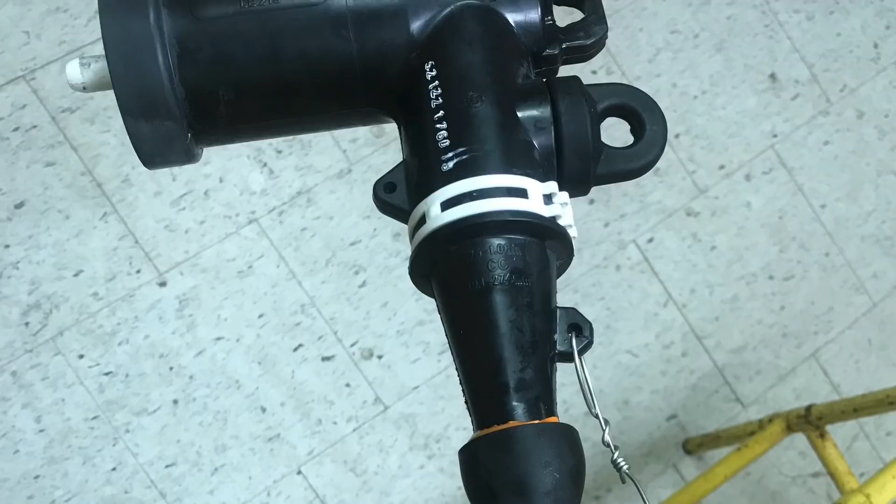In this video, I'm going to demonstrate how to install a Cooper 200 amp loadbreak elbow on a 1-aught compact copper tape shield EPR medium voltage cable.

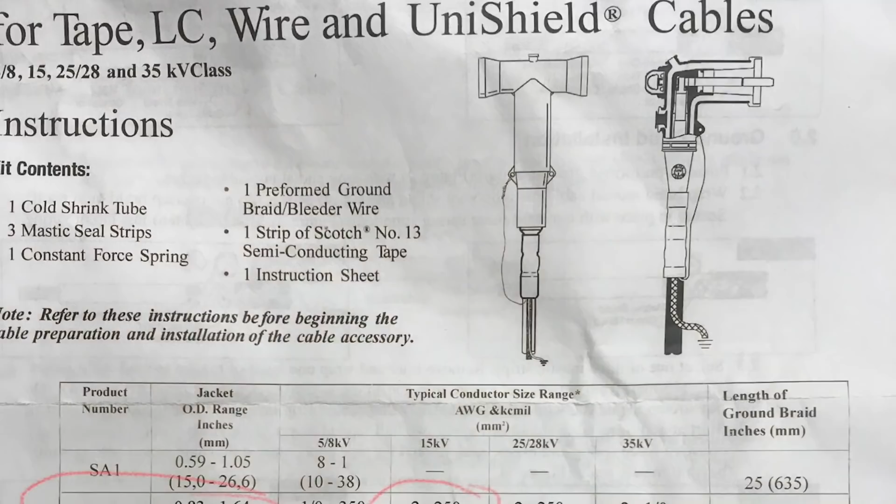Some things to verify before you begin the installation of the termination: that you have a compatible termination for the cable it's being installed on, a compatible shield adapter kit for the termination, and the appropriate size lug as well as the dies for crimping the lug.

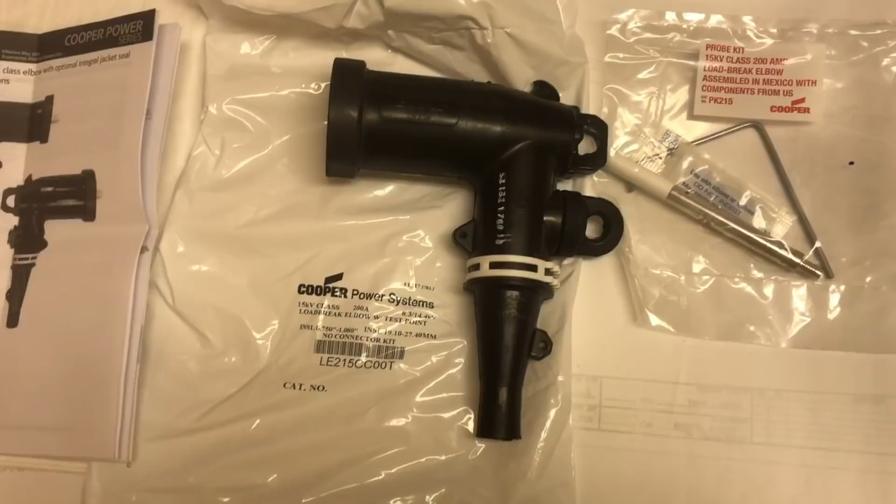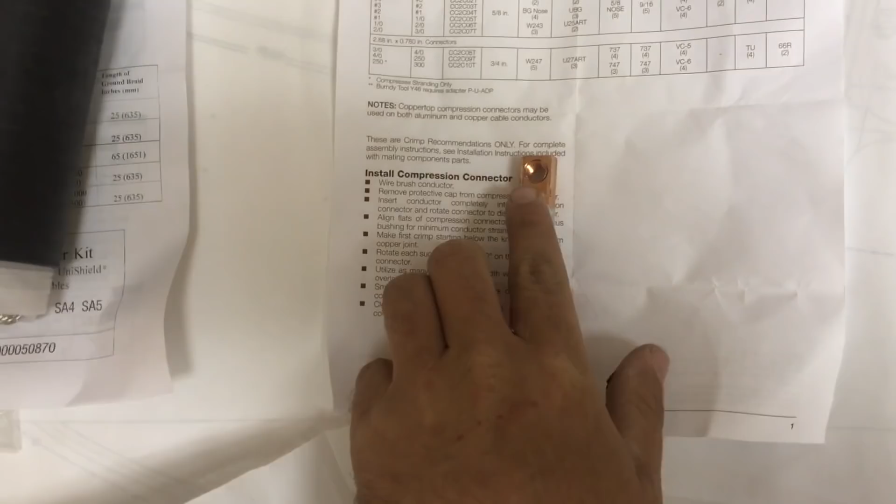Just going over the actual apparatus we're going to be installing today. This is a Cooper 200 amp loadbreak elbow with a capacitive test point. It comes standard with the probe insert tool and a couple of silicone packets. We have a 1-aught Coppertop with a threaded insert right there. You see it's got the threads in there, and that's actually what the probe itself is going to thread into once it's crimped onto the cable inside of the actual boot.

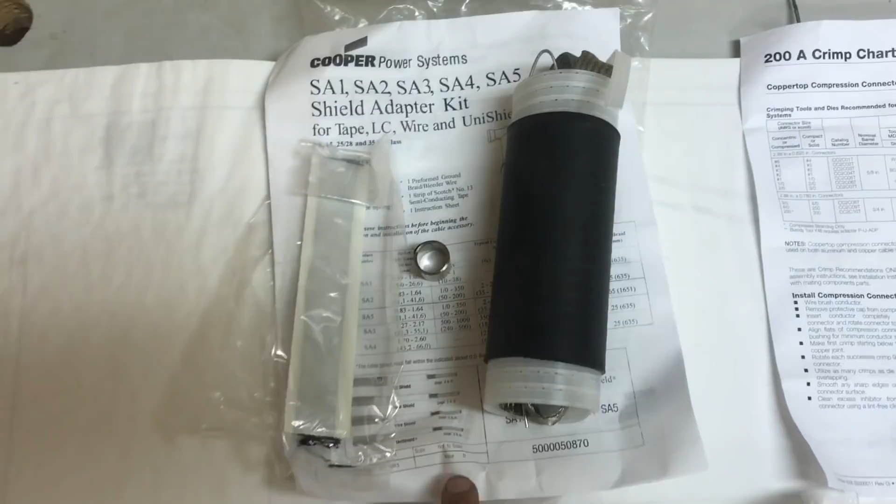And then we have a Cooper SA2 cold shrink kit with ground braid and drain wire, along with the constant force spring and the Mastic that goes along with the SA2 kit.

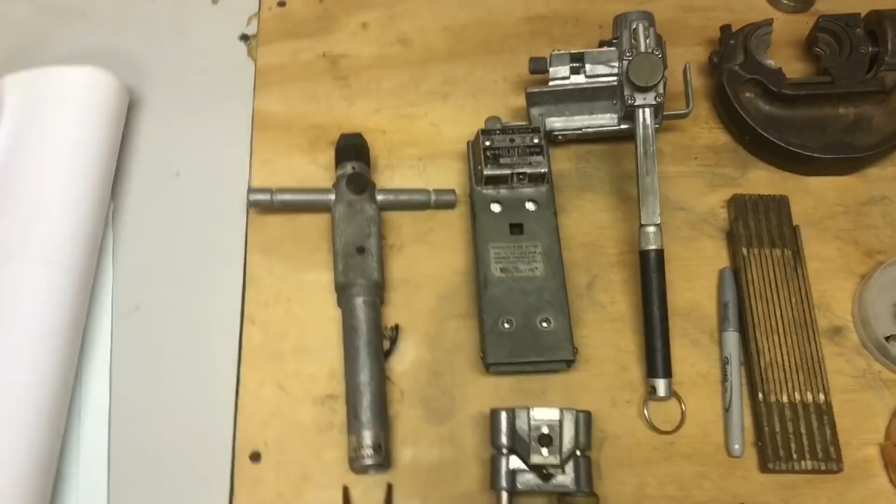I'm just doing an overview of the tools that we're going to be using. So from left to right, this is actually a Ripley brand probe installation tool, which is the same tool as this. It's just this is actually a torque wrench, and you get a little bit better bite on it, and it'll actually snap, it'll pop, when it reaches the appropriate torque.

This is a Speed Systems 1700 SS adjustable semicon score, and a Speed Systems 1542 CL 2CL adjustable insulation stripper, as well as a Speed Systems chamfering tool.

Over here we've got a silver Sharpie. We're going to be marking all the cable with that. It shows up really well, better than a black Sharpie or an oil pen. And we're going to be using a stick rule.

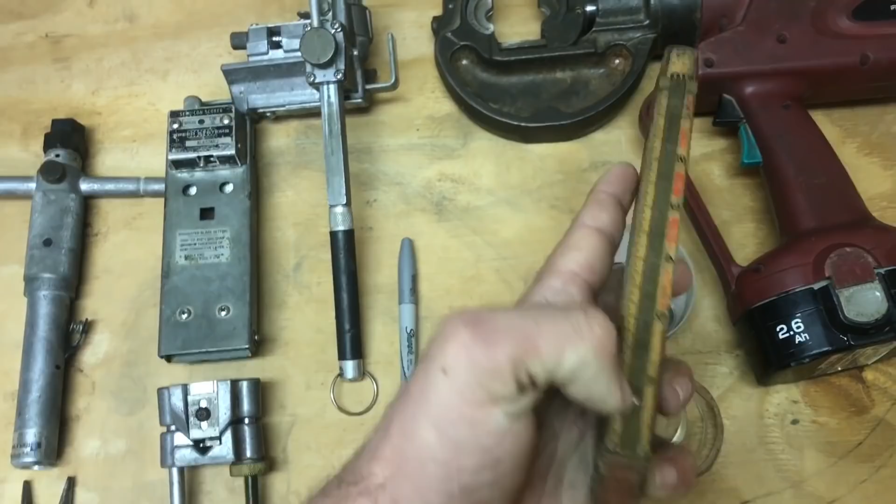And this particular stick rule actually has a slider on it so we can measure the depth of our connector.

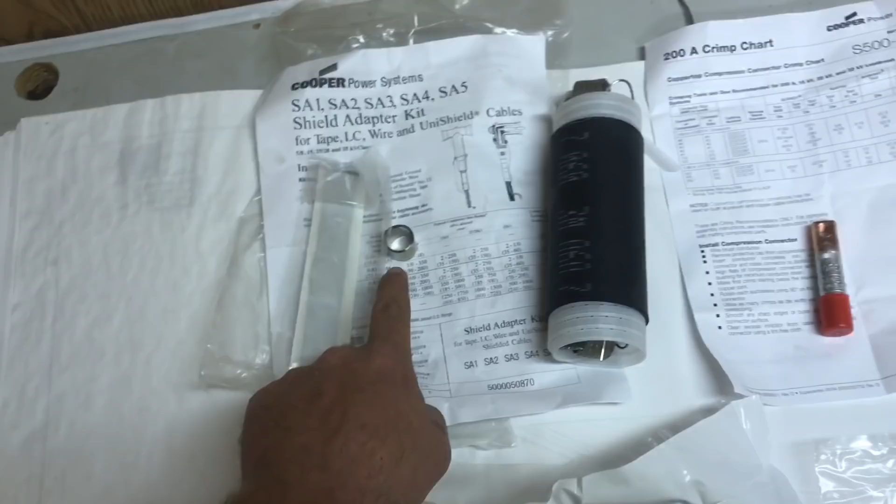These are constant force springs. This is actually a steel spring that has memory to it, just like the wristbands I used to get as a kid. These come standard in ground kits, just like that. And throughout the years, any extra parts and pieces - these are really handy for doing cutbacks on cables. So if you run into those, I'd recommend holding on to a couple. They'll come in handy, and I'll show you why.

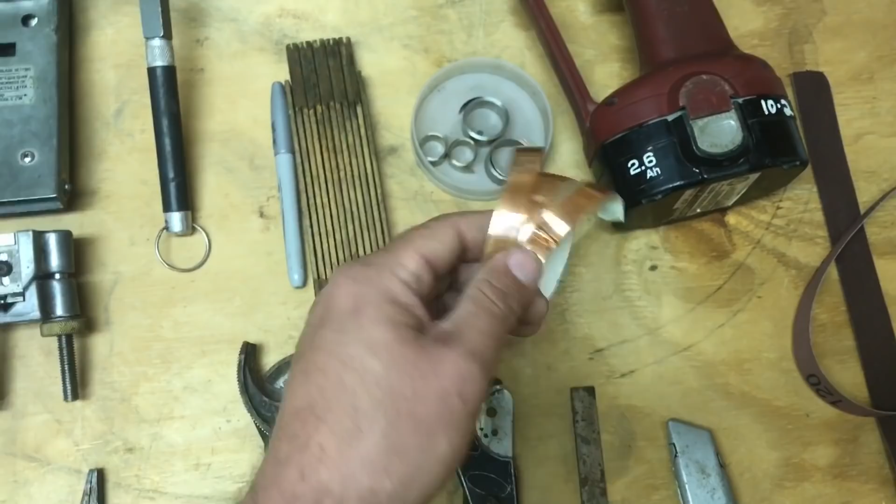This is copper tape, and this comes in handy for doing a cutback on the tape shield cable, which we're using. So I'll show you what that's for here in a little bit.

This is our PAT 750. This is a hydraulic crimper that we use on our termination end.

Some of the hand tools you're using: a standard pair of needle nose pliers, and I actually have a micro pair of needle nose pliers, which is extremely handy for getting into some of the tighter spaces of the cable and making a pretty exact cut or rip or whatever you need to.

This is a pair of duckbill pliers. I think Speed Systems makes a pair of these. These are actually channel locks, but these are really good for semicon cutbacks. Good pair of Klein ratchet cutters.

I wanted to point this out. This particular tool I'm not going to be using, but I did just want to highlight it. This is actually a PVC cutter, and what some guys in the field will use it for is making the ring cut on the insulation. I'm not a huge fan of using this tool because with a little bit of error you can squeeze too hard and actually cut through some of the delicate copper that's underneath. So I'm not actually going to be using that, but I just wanted to point it out.

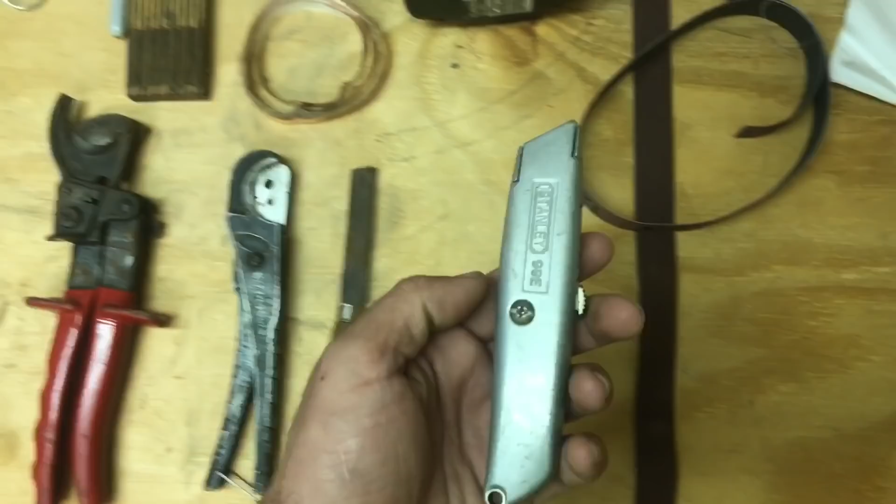This is a shoe knife that we use, a typical splicer's knife. We use that very frequently. And then this is a Stanley, just basic Stanley 99 razor knife, retractable blade. I'll use this every once in a while.

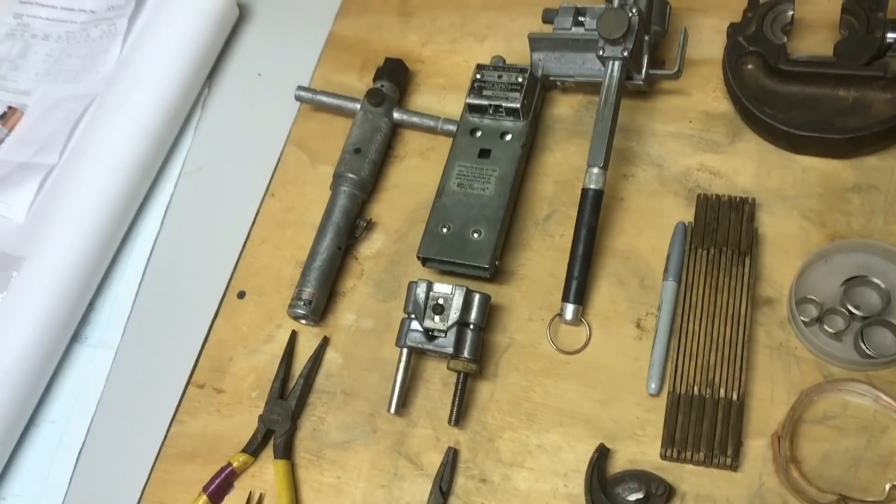Some terminations dictate, just because of the build of the cable or different factors, that you almost have to use a razor knife. Some guys will actually perform the entire splice with a razor knife. I prefer to use the specialty tools to do that - it's just a little less risk factor. I'm not saying you can't do it with a razor knife, it just takes a lot of knife practice, and it's very easy to mess up if you don't have the appropriate practice. So we may end up using this, we may not.

Moving over here to our cleaner, this is a Power Solve, a high voltage degreaser cleaner. We'll be using that to clean our cables. This is a lint-free wipe, it's a 10 inch by 10 inch wipe. And then we have 120 grit aluminum oxide sanding cloth. And that's a summary of all the tools we're going to be using for the particular kit.

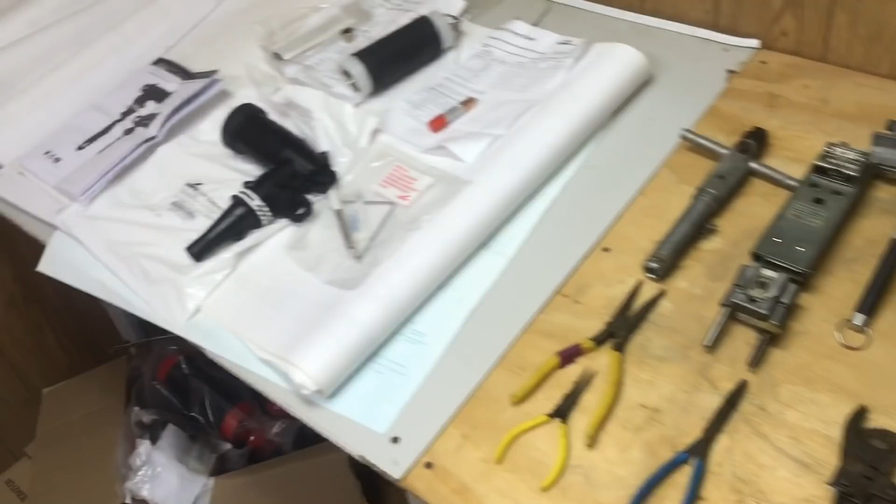This is the cable we're going to be using - a 1-aught compact copper EPR, or ethylene propylene rubber, copper tape shield cable. The cable itself is one size smaller than what it actually is, so if I say it's a 1-aught compact, it's actually the same size as a number 1 compressed cable. So all your terminations, like this copper top for instance - this isn't a 1-aught copper top, but it's actually a number 1 stranded copper top.

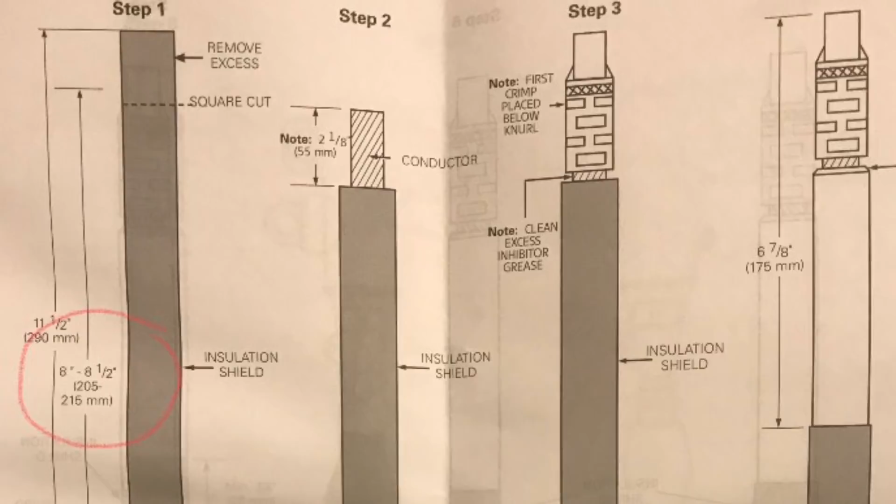So just something to keep in mind, the difference between a compact cable and a compressed cable. Our first step is determining what our jacket cutback length is going to be. This particular set of instructions is for a jacketed concentric neutral cable. On the left hand side you can see the cutback is 8 to 8.5 inches, which we would take the 8.5 inches. We have to compensate for our tape shield cable, so going to our SA2 instructions, it needs a minimum of 1.25 inches to make the connection to the ground braid. So we'd add the 1.25 inches to our 8.5 and come up with a 9 3/4 cutback. We'll go ahead and mark that on our cable and make our ring cut.

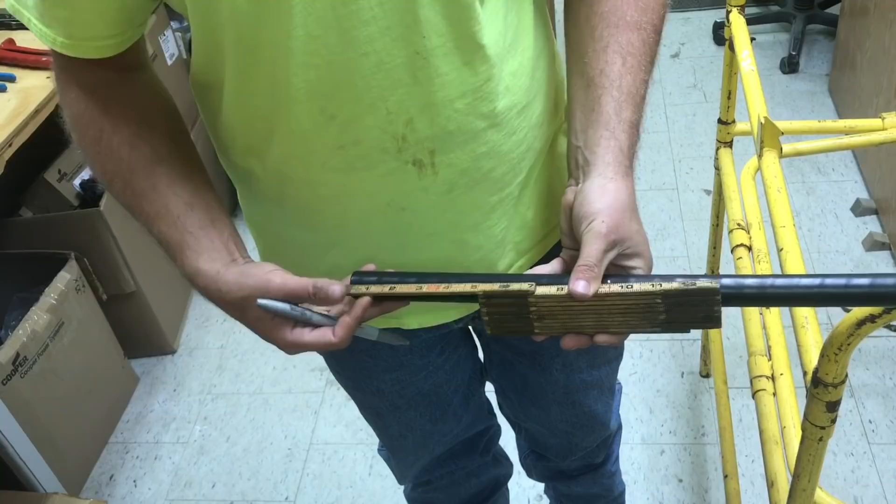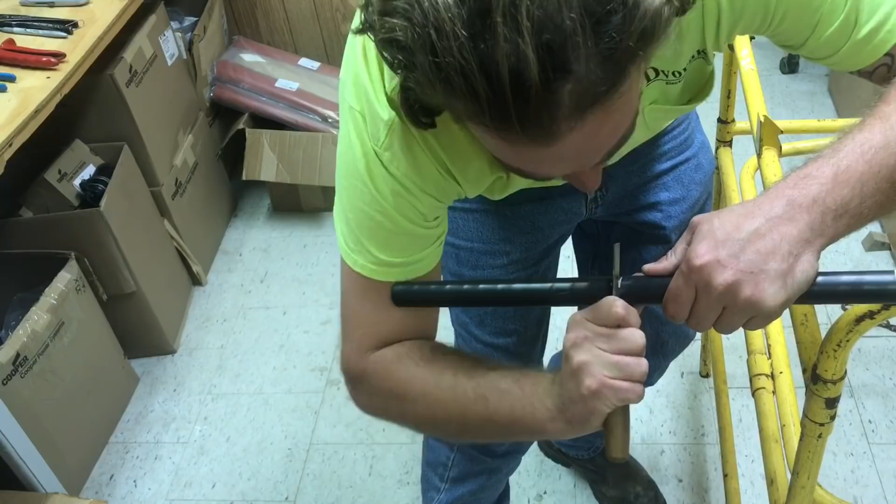The next cut made is the longitudinal outer jacket cut. It goes from the ring cut to the end of the cable. You need to be careful not to apply too much pressure to damage the underlying layers. Once the longitudinal cut is made, the duckbill pliers are used to separate the outer jacket and remove the outer jacket.

I apply a piece of vinyl tape to the end of the tape shield as not to allow the copper tape shield to unravel. I will then measure out the copper tape shield cutback length and then apply a piece of copper tape with the leading edge on the mark I've made.

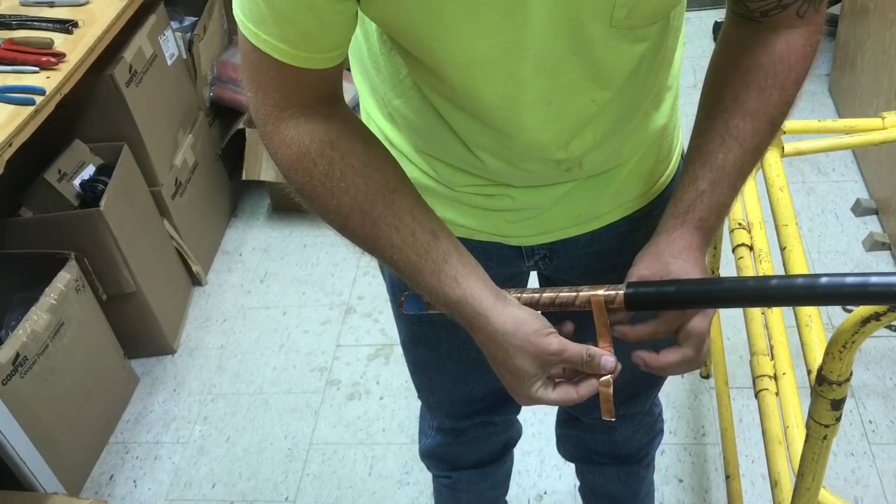I will then apply a constant force spring to the leading edge of the copper tape. This will allow me to pull back the copper tape and tear against the constant force spring. I'll now remove the copper tape shield. There's 2 pieces of copper tape shield, so I'll do this both at the same time. I begin wiggling back using force against the constant force spring and tearing in a diagonal fashion and around the cable. This will leave a clean factory edge, and you do not have to use any cutting tools to do so.

I will now remove the constant force spring. Because I put the copper tape on top of the copper tape shield, I can remove the constant force spring without unraveling the copper tape shield. I'll then take my shoe knife with the blade pointed towards the copper tape shield and flatten out any sharp edges.

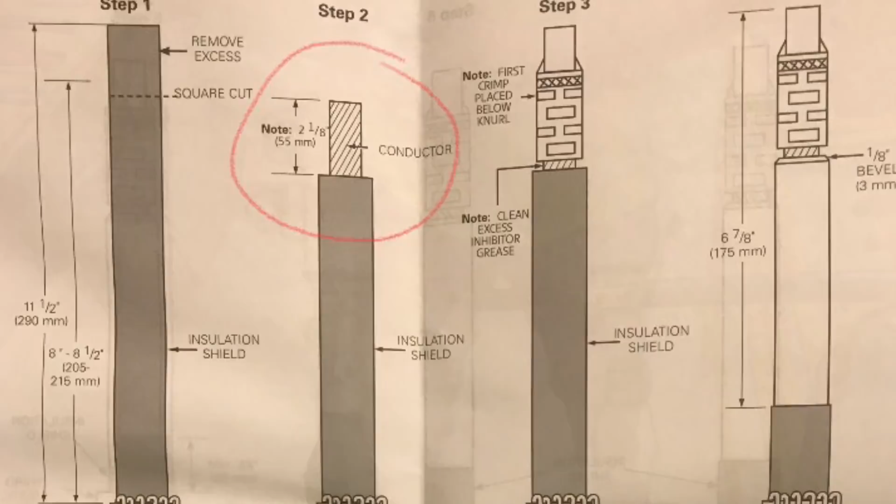I'll now perform the insulation cutback. According to the instructions, the cutback length is 2 1/8 inches. I'll take my insulation stripping tool, set the blade depth as well as the cutback length to 2 1/8 inches and perform a practice cut backwards as to not cut into the cable to verify that the blade depth will not penetrate through the insulation into the copper.

Using the chamfer tool, I will now install an 1/8 inch bevel on the end of the cable.

I'll now install the copper top and crimp with the Burndy Hypress.

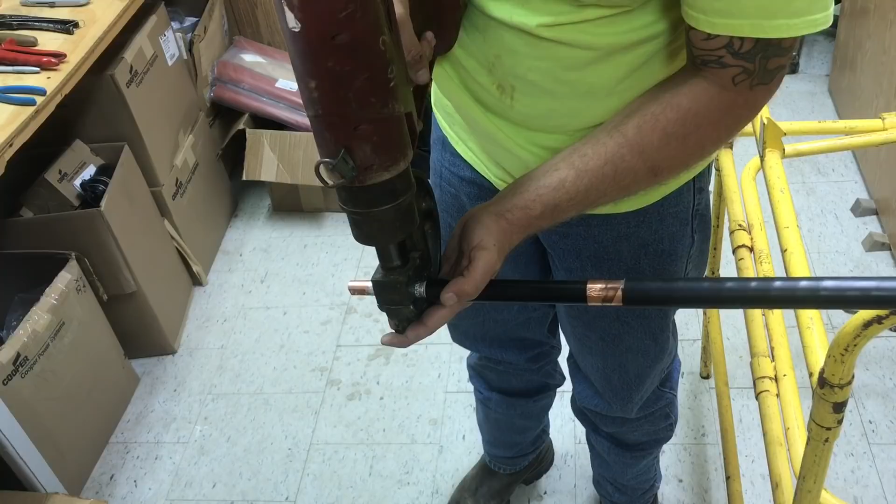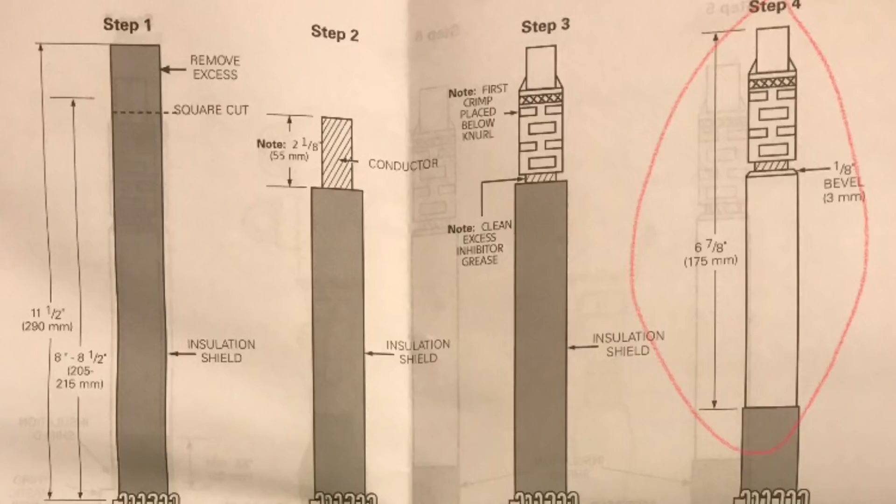I'll now measure the semicon cutback. You must measure from the crimped copper top to the semicon to ensure that when the boot is installed, the internal semicon layer will line up with your semicon cutback.

Using the semicon scoring tool, I'll make the initial square cut, then switch the tool over to spiral cut and spiral to the end of the cable, removing the tool. It's good practice to do a test cut with your semicon score on a scrap piece of cable or the very end of the cable to ensure that the blade depth is not too deep and will cut into the insulation below.

Using the duckbill pliers, I begin peeling back the semicon layer.

Using the 120 grit sand cloth, I will now sand the cable evenly on all sides.

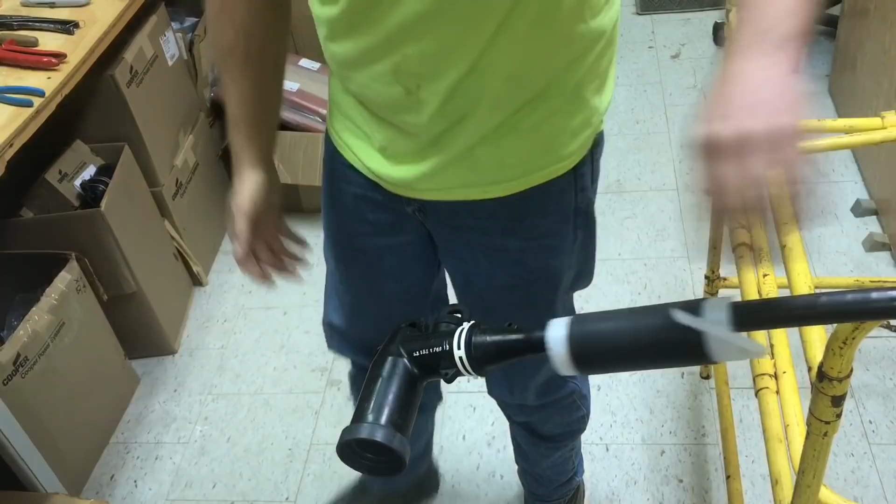I'll now install the 200 amp elbow. Before installing, ensure there are no sharp edges or burrs on the copper top. Install the 200 amp elbow facing the same direction as the threaded end of the copper top and push down until the copper top is seated fully inside of the 200 amp elbow.

Now install the probe. Align the 200 amp elbow with the threaded end of the copper top and install the probe by hand until snug. Make final torque with an appropriate probe insert torque tool or use the factory supplied torque wrench. If using the factory supplied torque wrench, you will turn the torque wrench until the bar is bent.

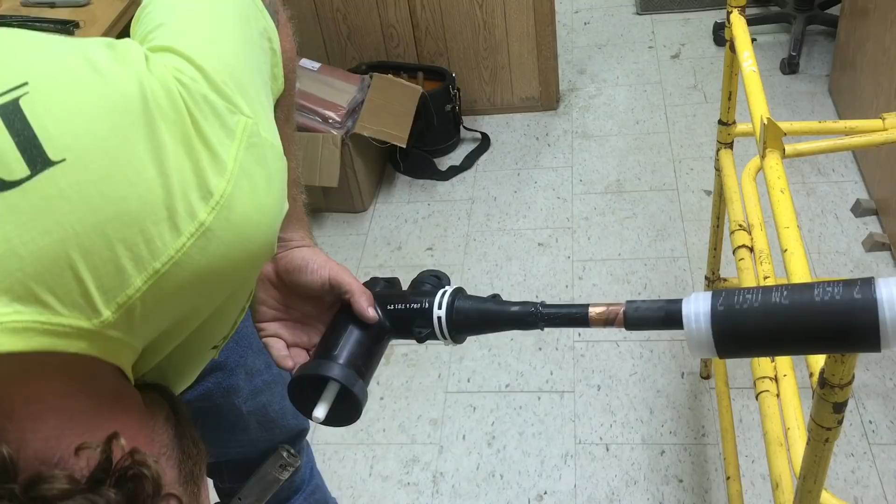Wipe off any excess silicone grease from the elbow installation.

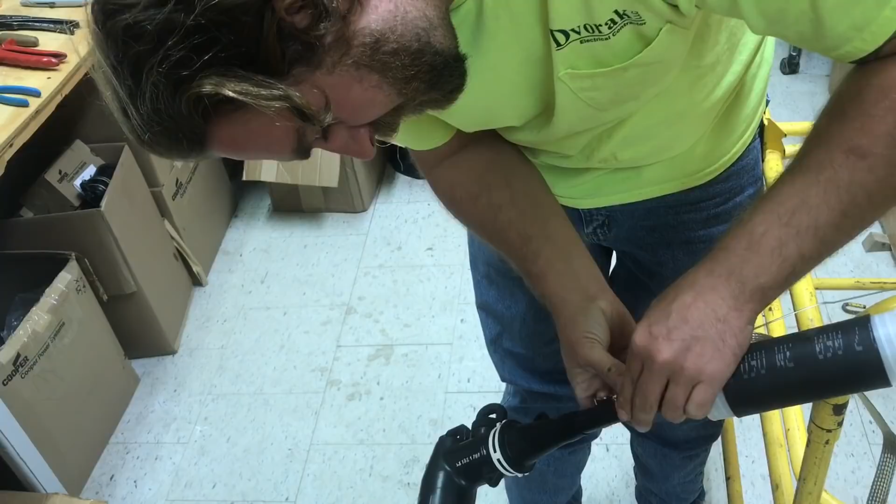Align the supplied ground braid in the SA2 kit onto the cable, mark and cut as to not let the ground braid overlap. Install the ground braid directly onto the ground tape shield. Ensure that the ground braid does not overlap and secure with a constant force spring and a wrap of copper tape.

Install the sealing mastic. The sealing mastic will be installed on the end of the 200 amp boot as well as the end of the cable jacket. One wrap needs to be installed underneath of the ground braid under the solder block, and another wrap installed over top of the ground braid over the solder block.

Secure and protect your sealing mastic from the cold shrink tube with one wrap of vinyl tape.

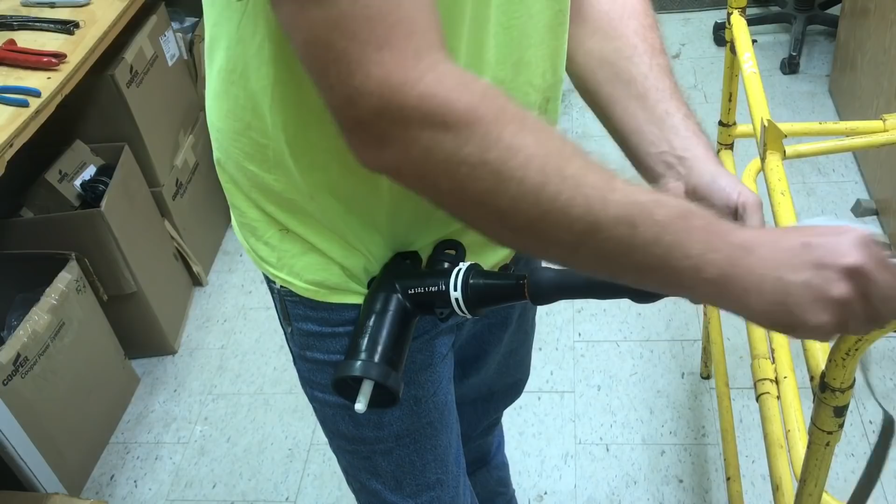Finally, install the static ground onto the back of the boot, twist the wire, and trim off excess. This is a completed Cooper 200 amp loadbreak elbow.